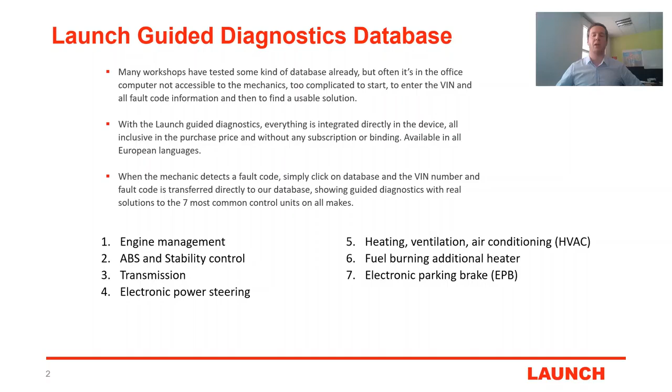This we will now show you live in the system. This is the start screen of the Euro Pro 5.

There are 2 ways of entering the new database. I will show them to you both. The first one is to basically click on the Maintenance button, and thereafter going into the Launch Professional database. This will directly take you to the online view of the database where you can choose which make you would like to go into.

For this demonstration purpose, we will use the Volkswagen Golf 6, a 2012, the 2.0 TDI. And here is how you enter the database.

The second way of entering the database is by going through a fault code. To show you this, we will use the demonstration mode. This mode has 5 simulators where you can simulate fault codes and test the equipment.

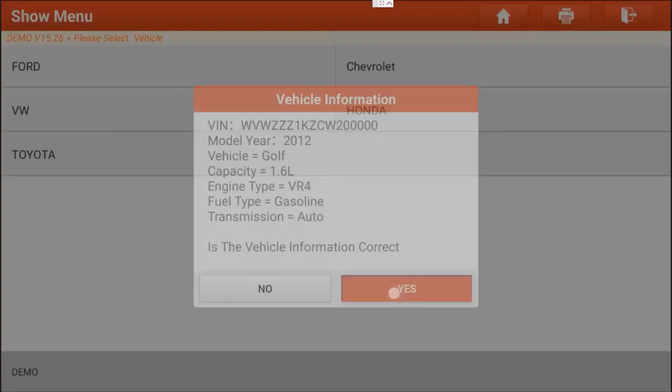We will also here use the Volkswagen. We'll enter the engine control module and read out the DTCs, the trouble codes. Here we have 3 trouble codes already saved, and we simply click one to enter the database again.

For some models, you have to also select the engine code. I will show you how to easily find what engine code the car has. Click on one for now, and then click on the picture of the car for change selection. Then click on Show ID Location.

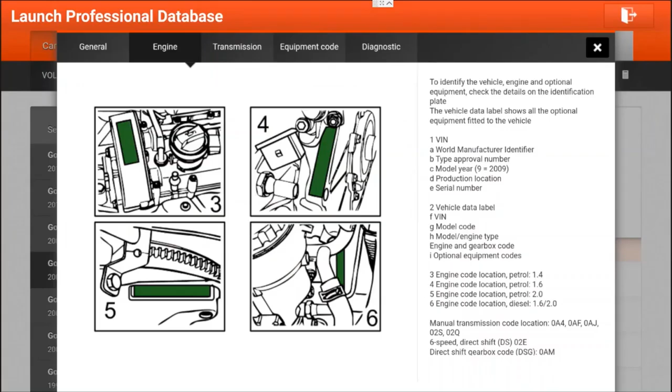Here, for every individual make, you will find out where to find the engine code. And then you have the correct selection.

We will go into the electronics, and here is where we find the 7 ECUs with the guided diagnostics: the additional heater, the air conditioning, the electronic power steering, the transmission, the ABS, and the engine management. The parking brake system is missing on this car, which would have been the 7th one.

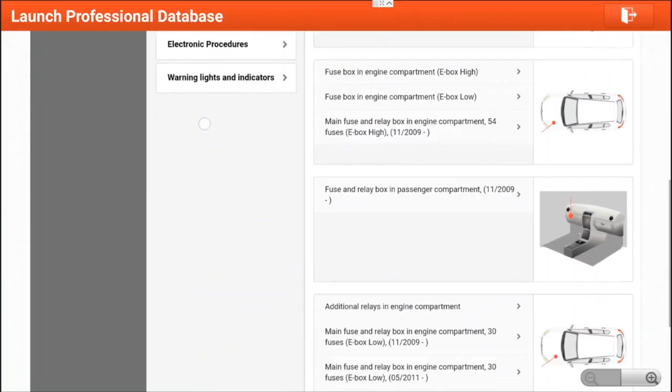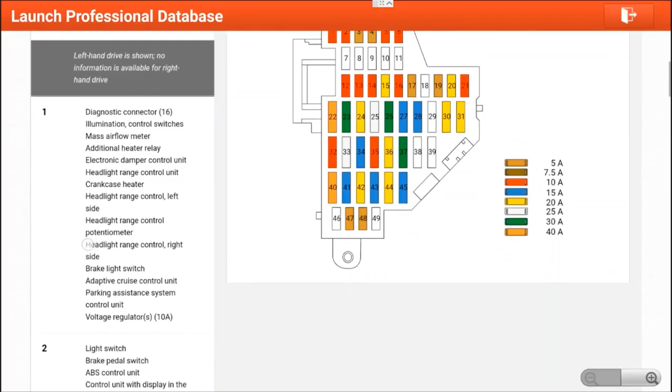In fuses and relays, you will find all the positions. You can click into one to find more detailed information. Select one and it will be highlighted on the picture.

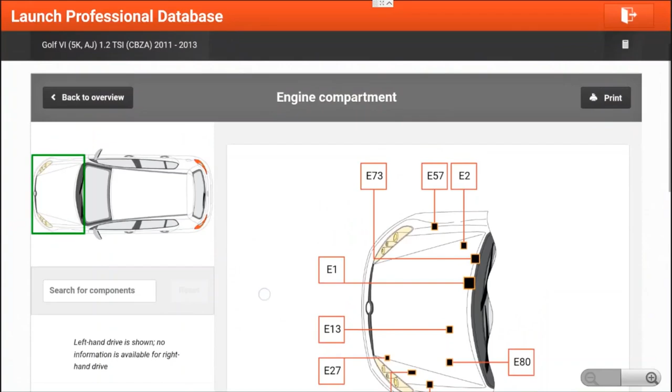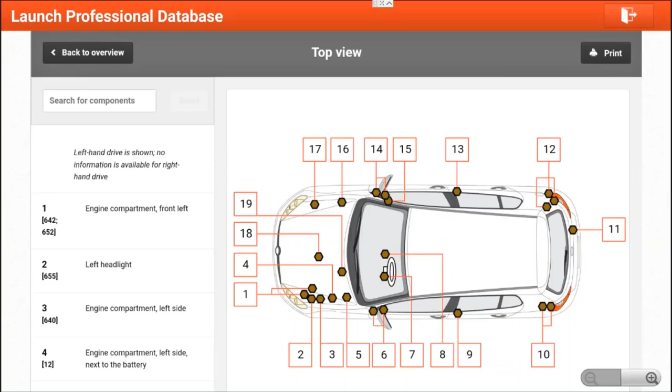Here you can also find locations of different components, for example the EOBD connector, the location of ECUs, the location of grounding points, and here you can find warning lights indicators.

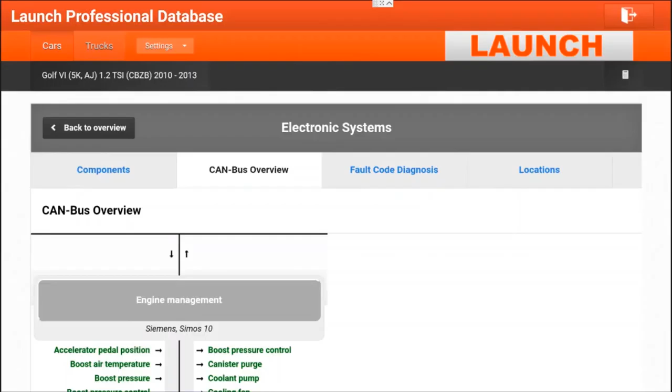We will go back to all systems and enter the engine management system. Here you could, for example, enter a fault code, or you can enter the CAN bus overview. On the left side, you have your ingoing sensors, and on the right side, outgoing actuators.

We can go into the coolant temperature sensor 1. You will get the wiring diagram. If you click on location, you can see where this part is placed in the car.

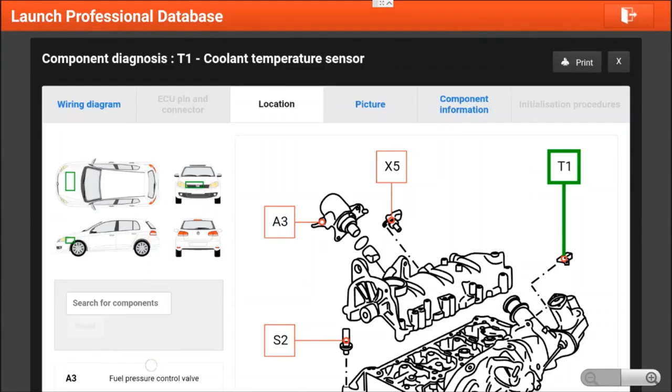And you can click on picture to get a high resolution picture of the part and find vital information to further diagnose.

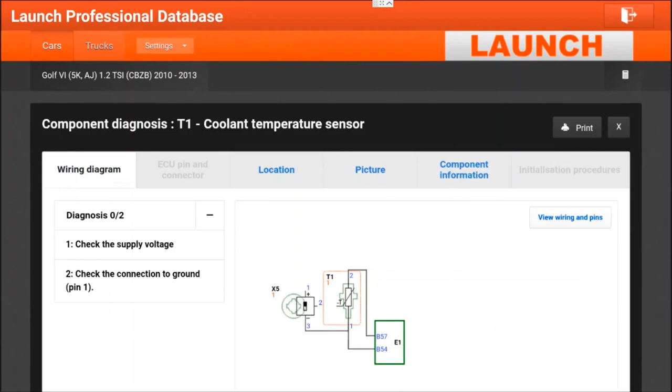Going back to the wiring diagram, you find your guided diagnostics on the left side. Here is where you step by step can solve the problem.

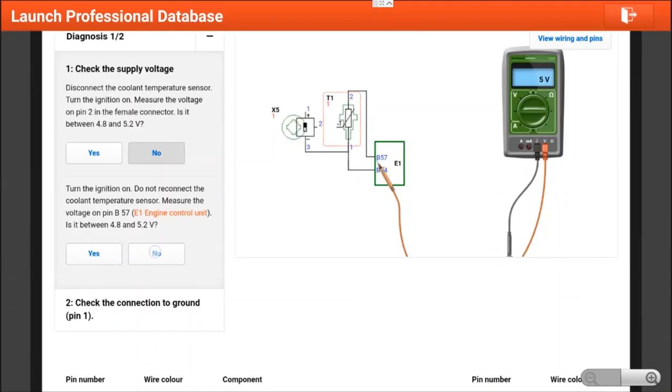We will follow this step 2 together. We will look for the port B54.

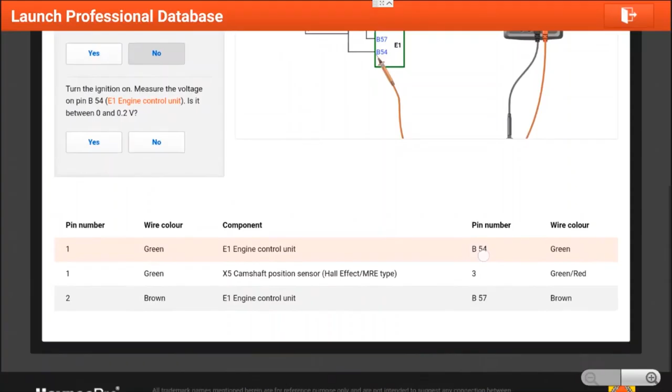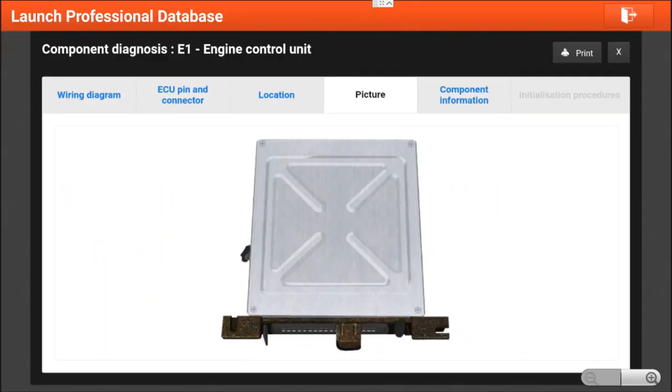We click on the link for ECU engine control unit. And we will find all the ECU information. If we click on ECU pin and connector, we should be able to find our port here.

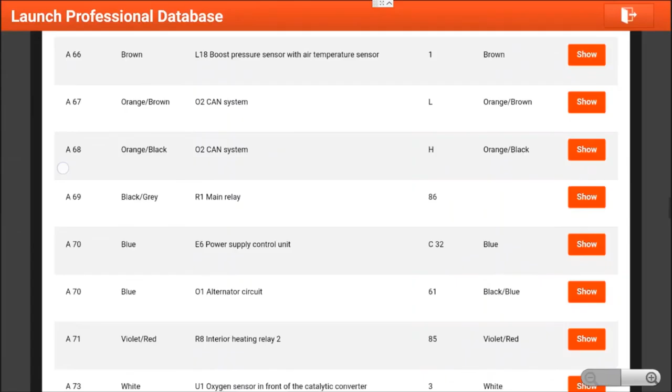There it is. We click on show and it will take us back to where we were.

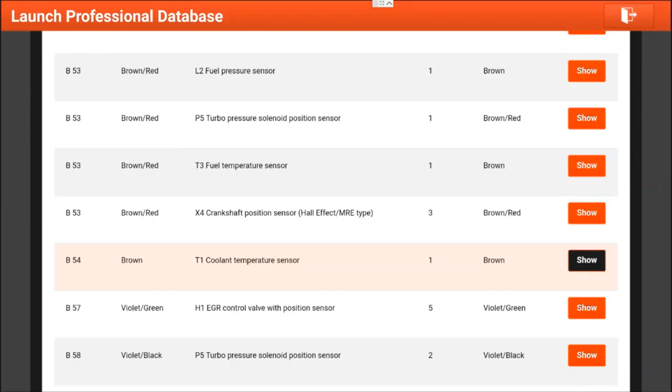To show the power of the database again in an easy way, we will use the demo mode with the Volkswagen, and we will look into the 3 fault codes we have in the ECU for motor and one by one go through them.

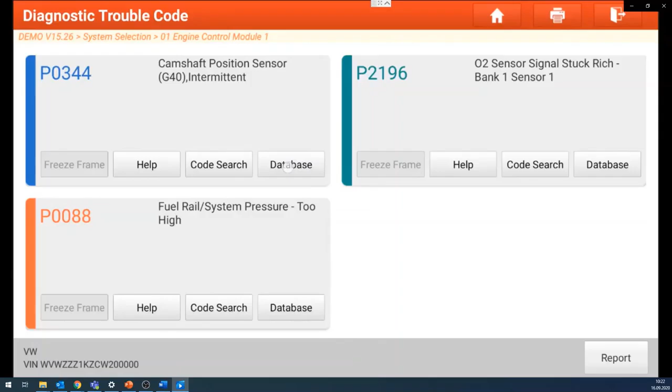For the first one, we have a camshaft position sensor with a fault code. The fault code gets transmitted directly to the database. You can click on the fault code and go in to show diagnosis.

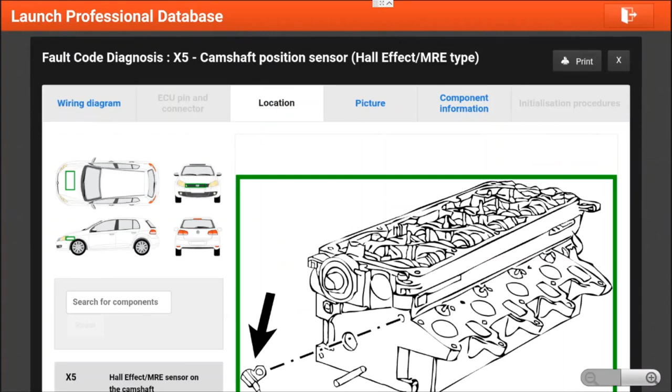Here again, wiring diagram, the location of the part, some high resolution picture and important information.

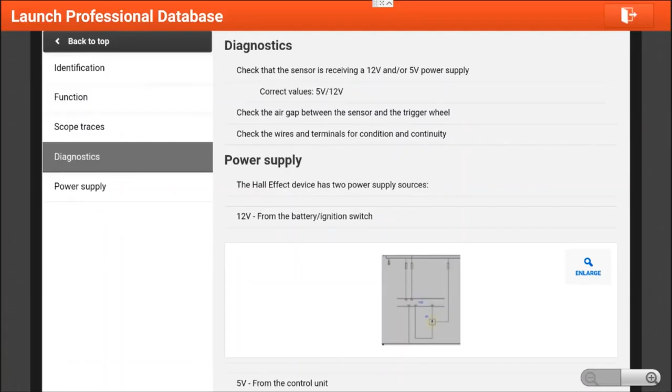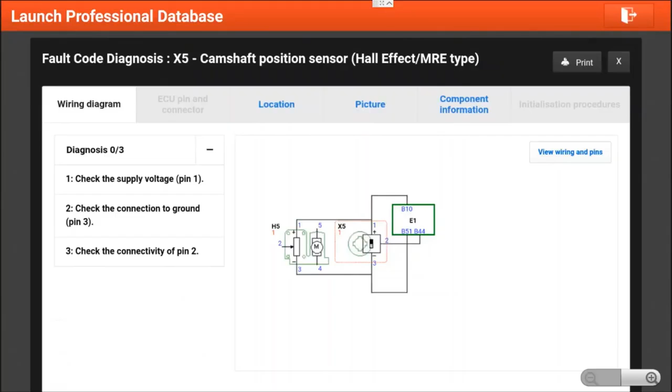And again, going back to the wiring diagram, you have your guided diagnostics on the left side. Go through them step by step to solve the issue.

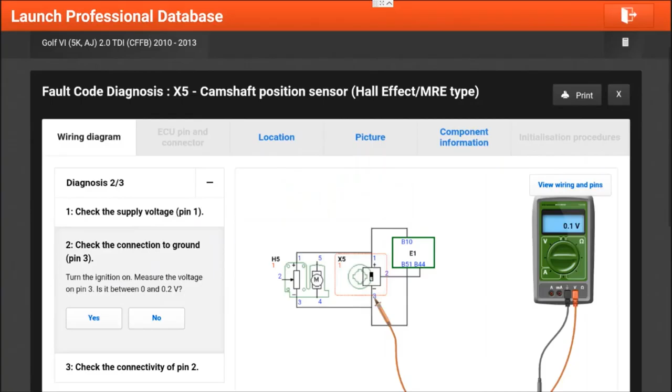We will go to the second fault code, an oxygen sensor with a fault code.

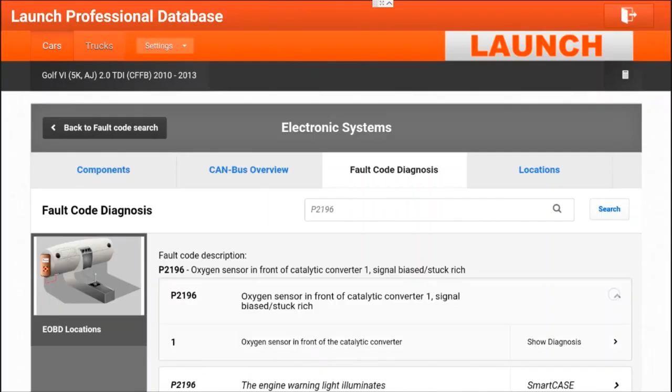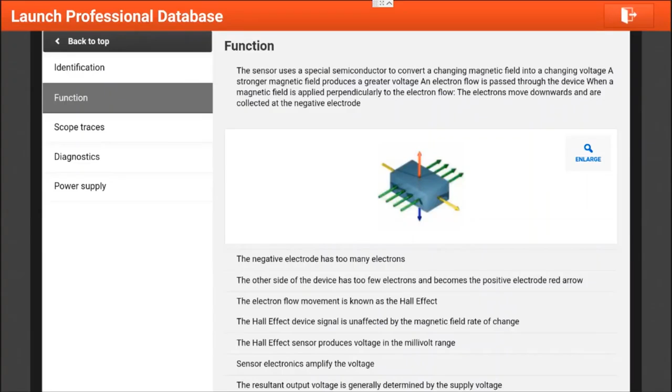Also here, we enter the show diagnosis. And we find the similar information as previously shown. Even some detailed information about waveforms.

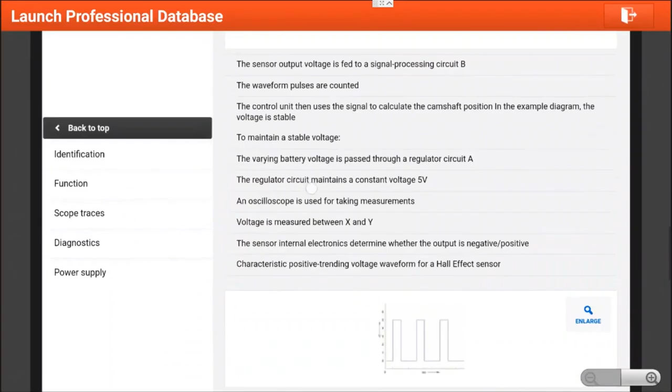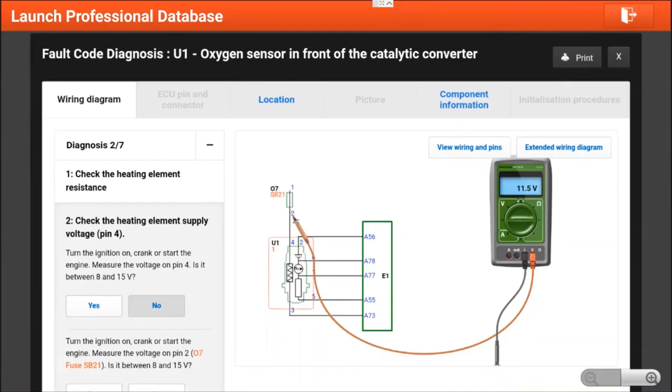We go to our guided diagnostics and we start to troubleshoot. In this example, we see, for example, that we should check for a fuse. We can easily find the location of the fuse.